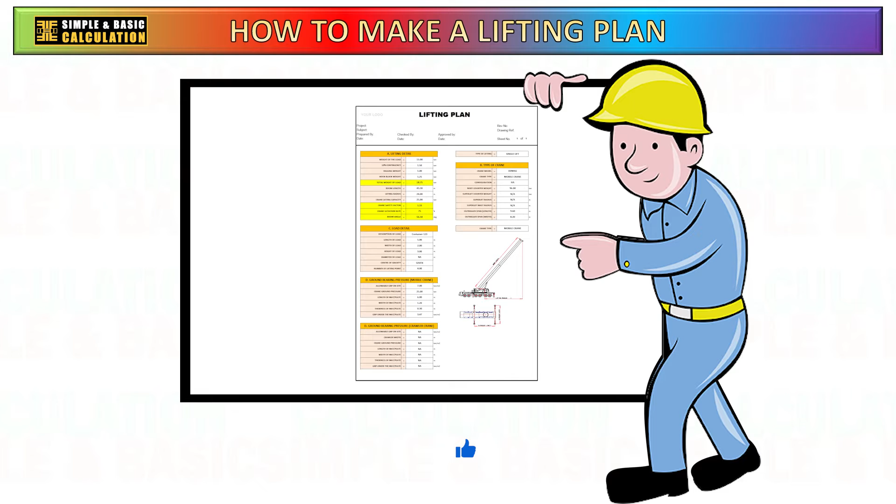Hello. In today's video, I will show the process of developing a lifting plan, and the various considerations that should be incorporated throughout the planning stage. The development of a lifting plan, including the utilization of a crane, requires careful assessment of multiple aspects in order to guarantee both the safety and effectiveness of the operation. The following are some of the most typical things that you must be considering when developing a lifting plan.

The first thing to do is to understand the load. In order to choose the proper lifting equipment and rigging equipment, it is essential to take into consideration the weight of the load. To guarantee that the lifting capacity of the lifting equipment is not exceeded, it is necessary to have knowledge of the load weight.

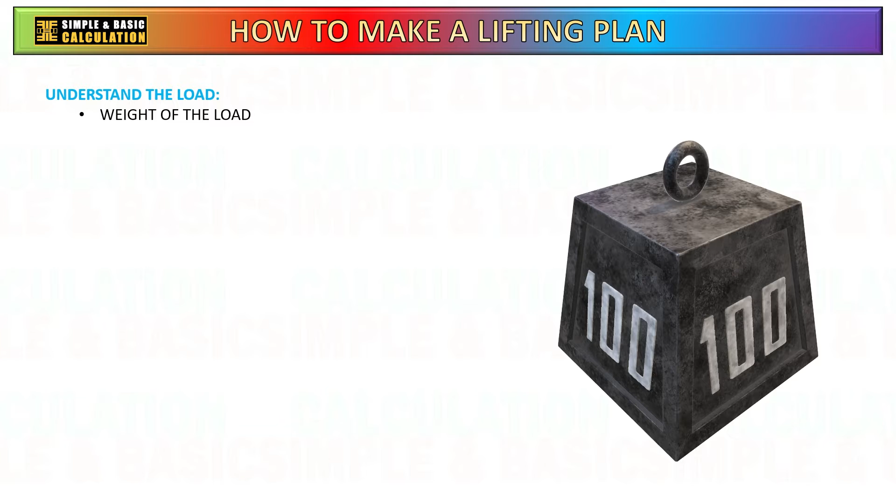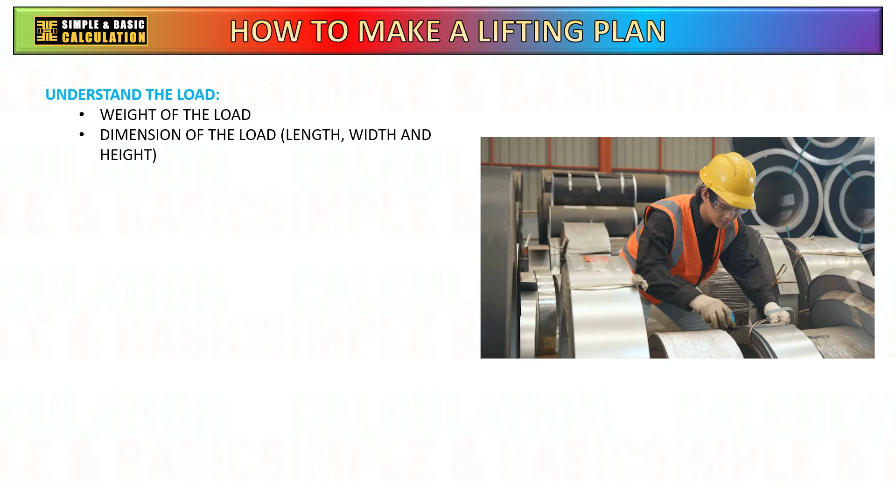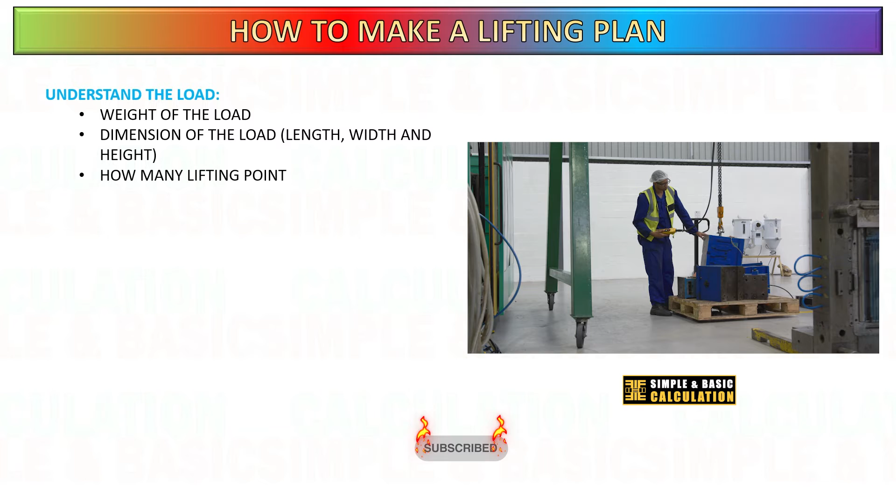Next, we need to take into account the dimensions of the load that needs to be lifted. It is important that you have information of the dimensions, specifically the height, width, and length. The next consideration is the lifting point of the load. During the planning stage, it is important to carefully consider how you want to secure or rig the load during lifting.

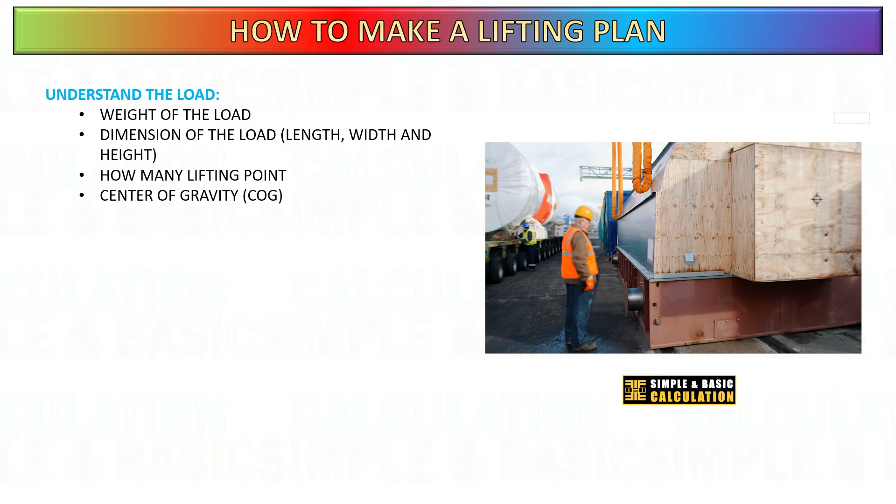The center of gravity of a load plays a critical role in the safe and efficient hoisting using lifting equipment. The center of gravity represents the point at which the entire weight of the object is concentrated. Hoisting a load with an uneven distribution of weight or an off-center of gravity can lead to instability and tipping, potentially causing accidents or damage to property and equipment.

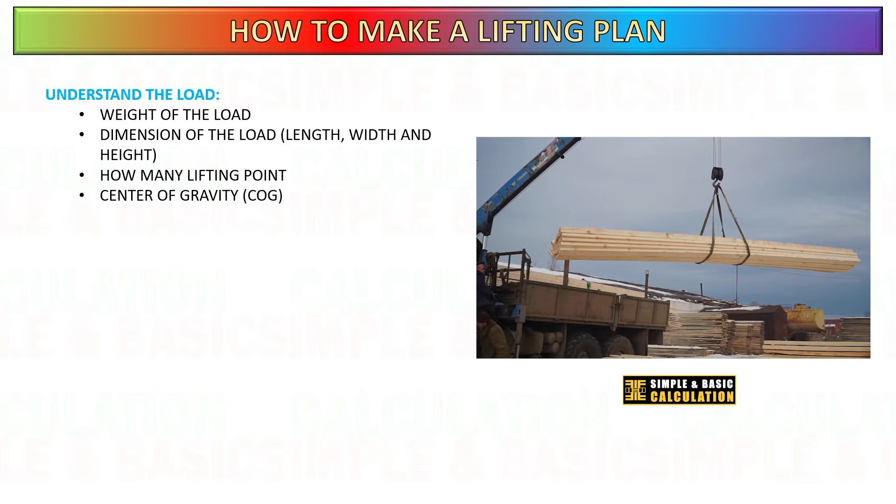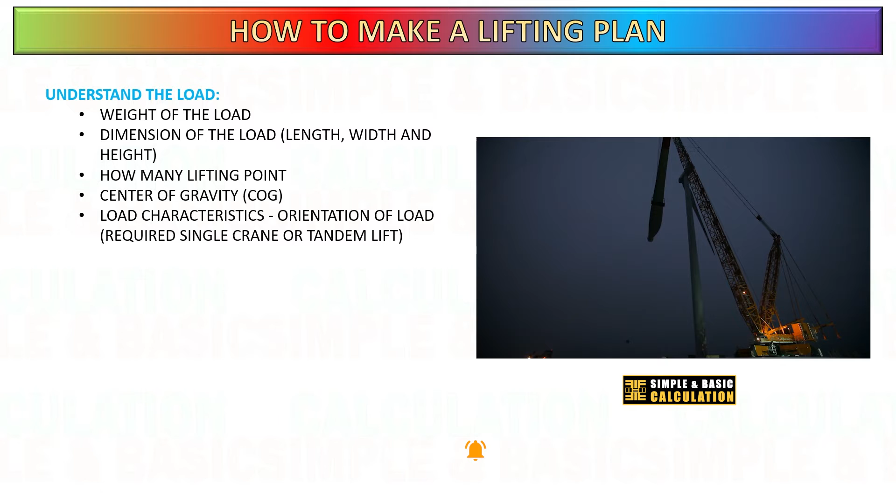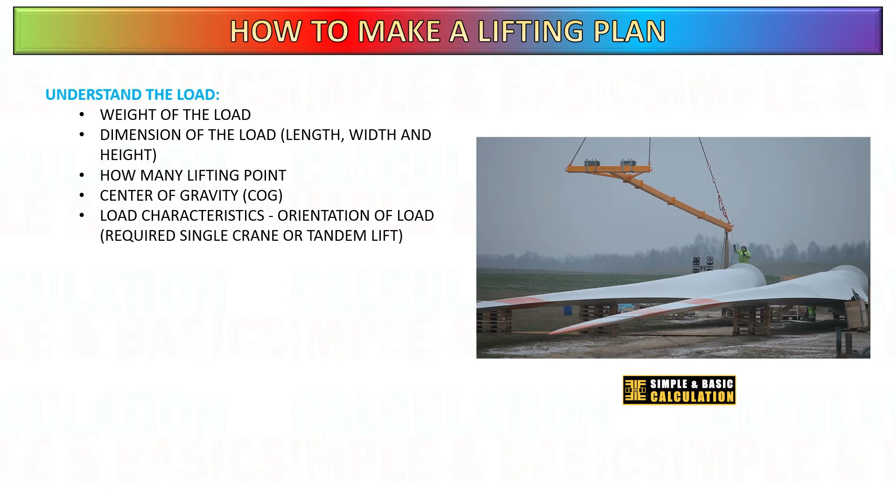Understanding the characteristics of a load, including whether it is being hoisted horizontally or vertically, is critical for safe and efficient lifting operations. The orientation of the load affects the rigging configuration, and if required, the lifting equipment to make it vertical. Hoisting a load horizontally requires different rigging setups compared to hoisting it vertically. Knowing the load orientation ensures that the rigging and lifting equipment is designed and applied correctly for safe lifting.

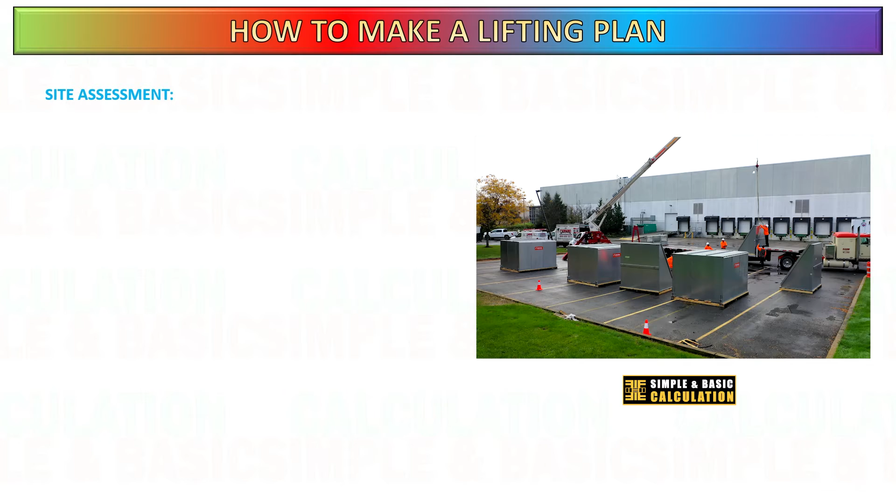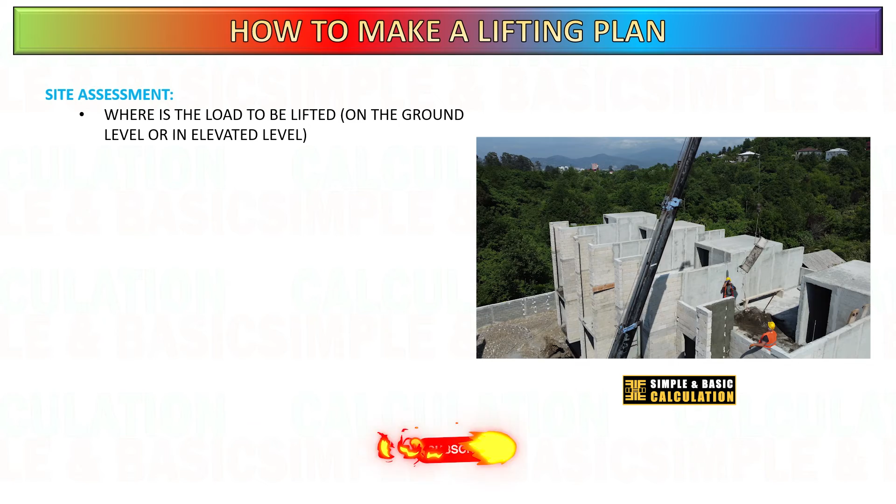Next, site assessment. Determine the location of the load that has to be raised, as well as whether the load should be hoisted on the ground level or in the elevated level. With this information, you will be able to determine the necessary length of the boom for lifting.

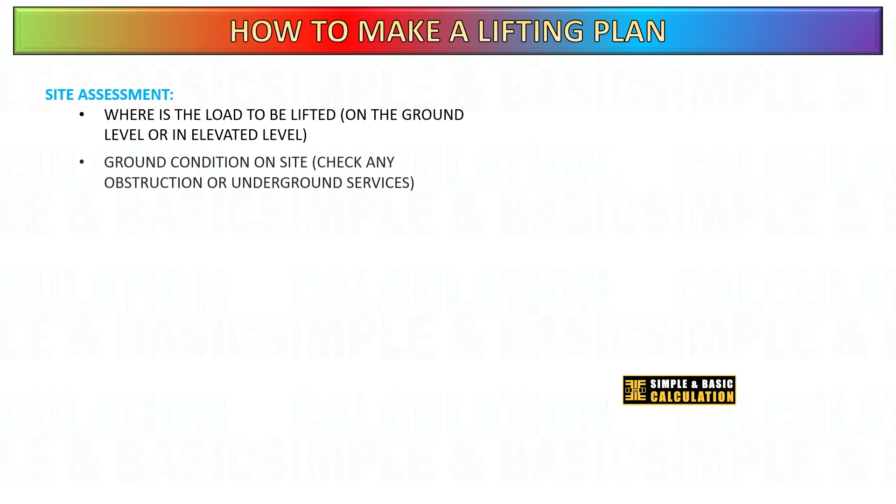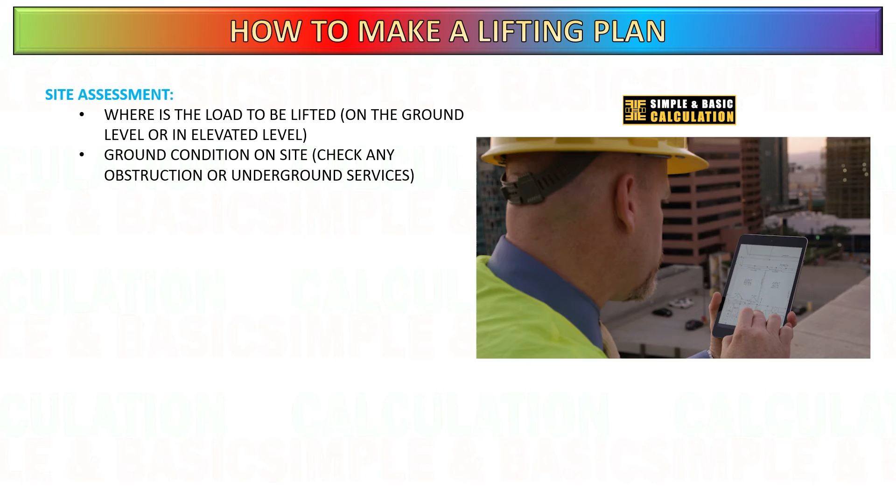Assessing the ground conditions is crucial for lifting operations to ensure safety, stability, and the overall success of the lift. A firm and level ground surface provides a stable foundation for the lifting equipment, reducing the risk of tipping or sinking during lifting. Uneven or soft ground can result in uneven weight distribution under the crane's outriggers or supports. Proper ground assessment helps identify potential hazards during lifting.

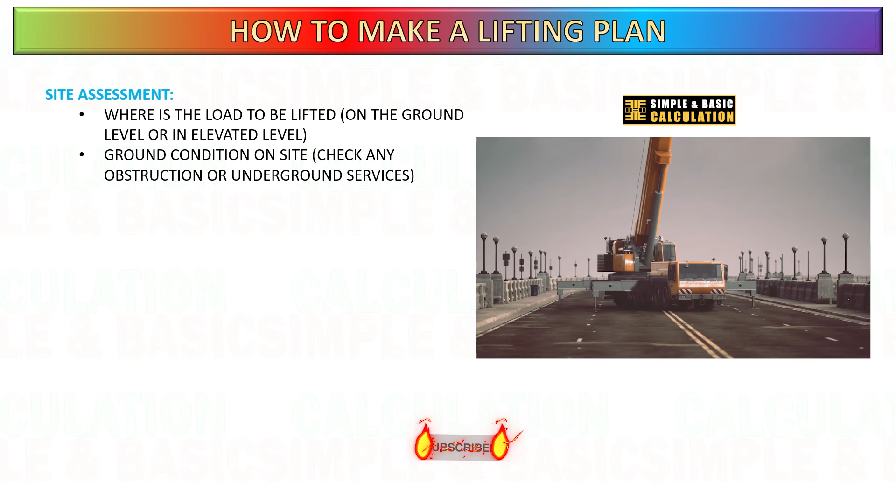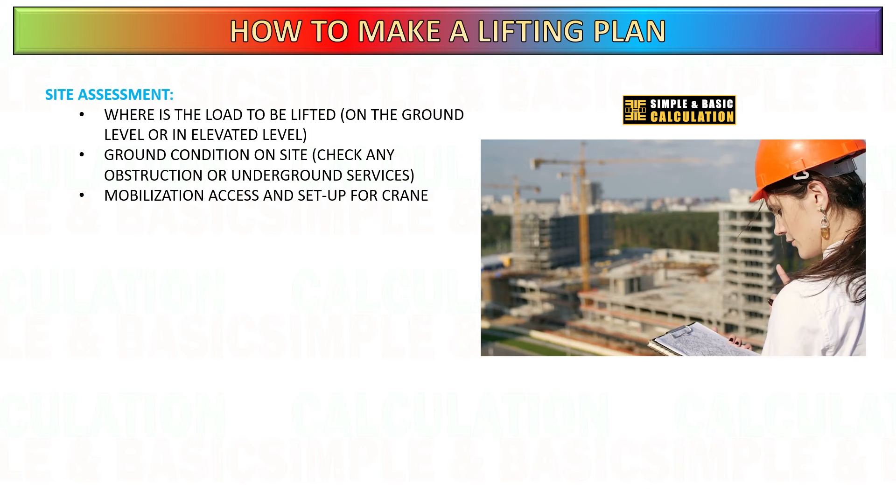Mobilization. Site access for lifting equipment is an important thing for the planning stage. Site access allows lifting equipment to be transported to the location where lifting operations will take place. Proper access roads and pathways are necessary to accommodate the size and weight of lifting equipment. Adequate site access enables cranes to be positioned and set up in the desired location for lifting operations. The availability of clear and accessible areas minimizes obstacles and facilitates crane assembly and stabilization.

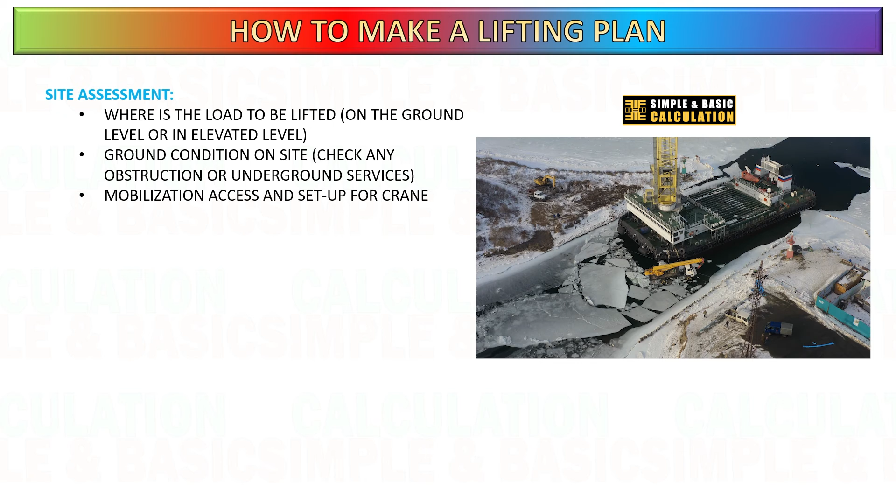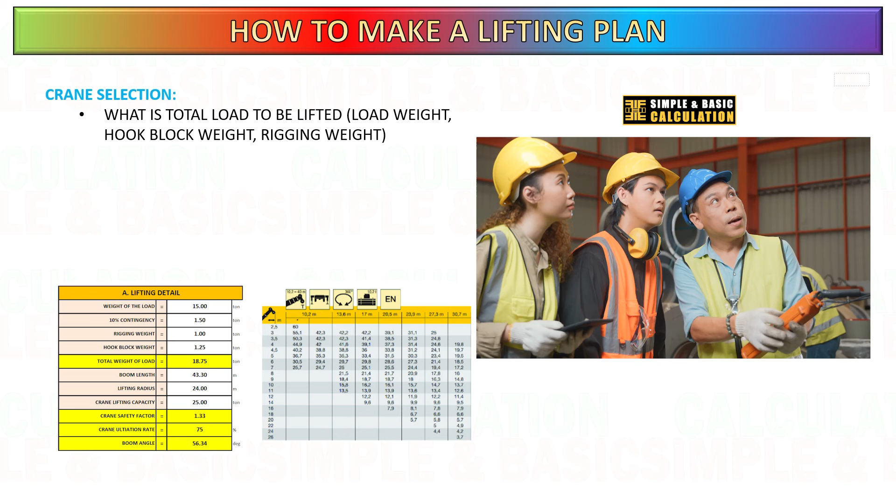Lifting equipment selection. After determining the total load that has to be lifted, the weight of the load, the weight of the hook block, and the weight of the rigging, you will be able to select the appropriate crane size for lifting based on the lifting equipment load chart provided by the manufacturer.

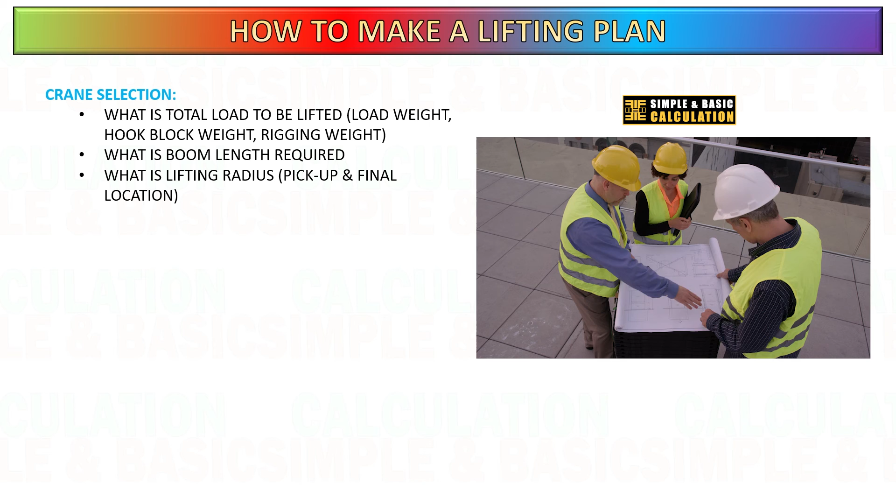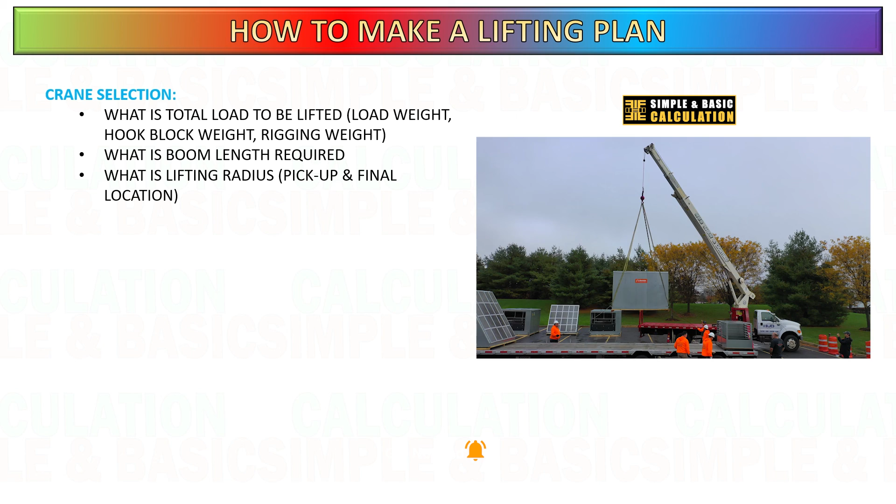Based on the drawing provided by the client, or site assessment, you will be able to determine the required boom length for lifting, as well as the lifting radius at which you will pick up the load and the final landing place. These are important points to consider for choosing lifting equipment. Once you have acquired all this information, you may proceed to choose the right type of lifting equipment for your specific task.